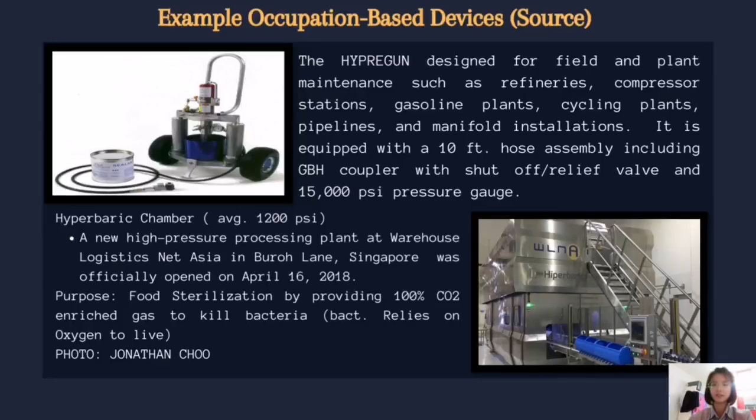Next is pressure danger to humans. First is respiratory disease, a type of disease that affects the lungs and other parts of the respiratory system. Respiratory disease may be caused by infection, by smoking tobacco, or by breathing in secondhand tobacco smoke, radon, asbestos, or other forms of air pollution.

Next is electrocution. Electrocution is death or severe injury caused by electric shock from electric current passing through the body. The word is derived from electro and execution, but it is also used for accidental death.

Third is burn. A burn is an injury to skin or other tissues caused by heat, cold, electricity, chemical friction, or ultraviolet radiation. Most burns are due to heat from hot liquid, solid, or fire. Burns occur mainly in the home or the workplace.

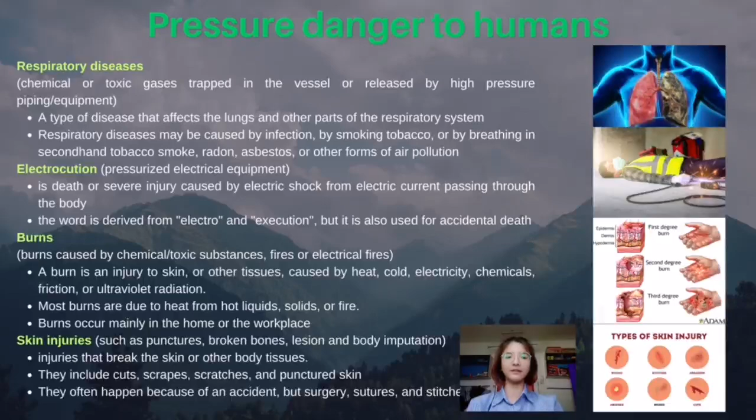Fourth is skin injuries, injuries that break the skin or other body tissues. They include cuts, scrapes, scratches, and punctured skin. They often happen because of an accident, but also surgery, sutures, and stitches.

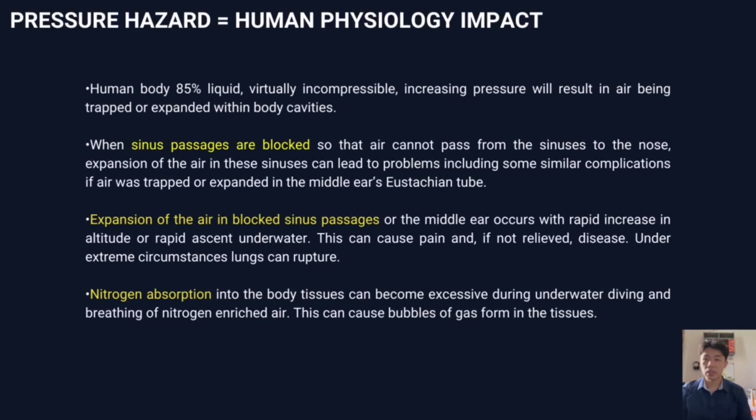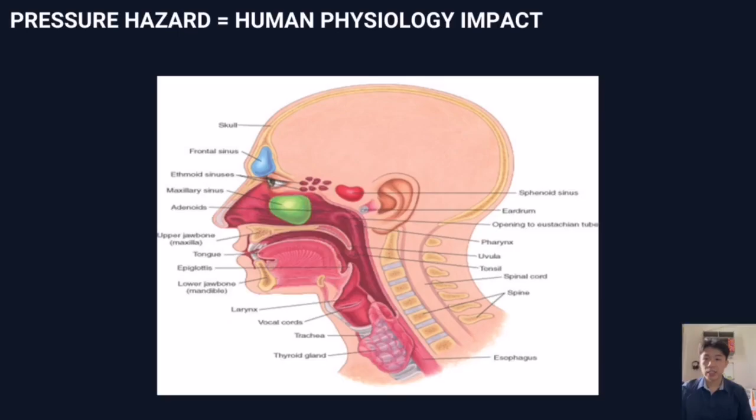A reduction in partial pressure can result in low oxygen, which can cause breathing problems like hypoxia, meaning too little oxygen, or breathing oxygen under pressure that is too high, called hyperoxia. It can cause nitrogen washout, oxygen toxicity, and oxidative stress.

Next is nitrogen narcosis, a problem resulting from a higher than normal level of nitrogen pressure. It can cause a reduction in cerebral and neural activities, leading to euphoria and loss of reality.

The symptoms of this illness are poor judgment, short-term memory loss, trouble concentrating, a sense of euphoria, disorientation, reduced nerve and muscle functions, and hyper-focusing on a specific area.

And for the third one, hallucination. Decompression sickness can result from the decompression that accompanies a rapid rise from sea level to at least 18,000 feet, or rapid ascent from around 132 feet to 66 feet underwater.

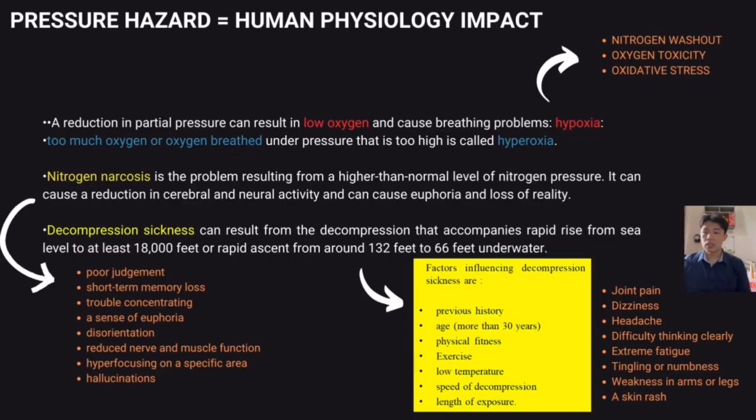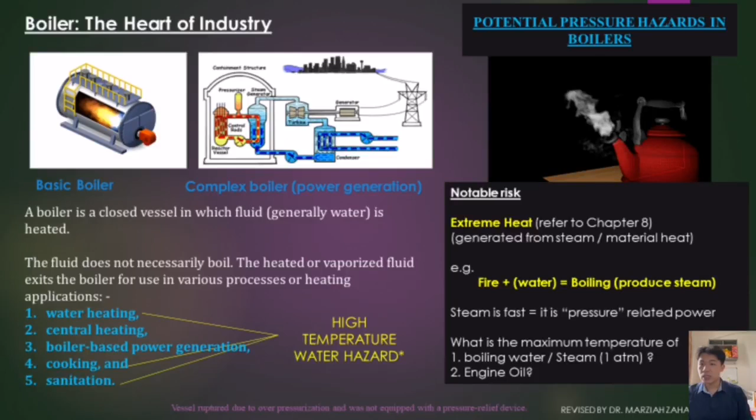Consequence is complete rupture or crack. First is blast effect due to sudden expansion of content of the vessel. Next is possible injury and damage. Third is suffocation or poisoning of employees depending on the contents of the vessel. Also explosion and fire, and chemical and thermal burns from contact with the content of the vessel.

The type of injury has four categories. First is serious burn, second is long-term scar, third is infection, and the last is death.

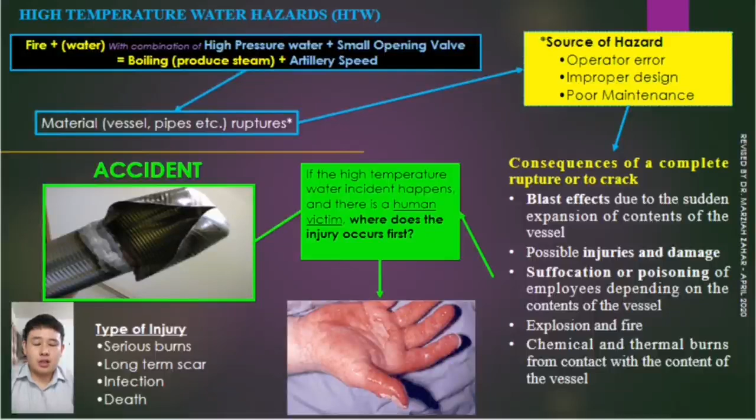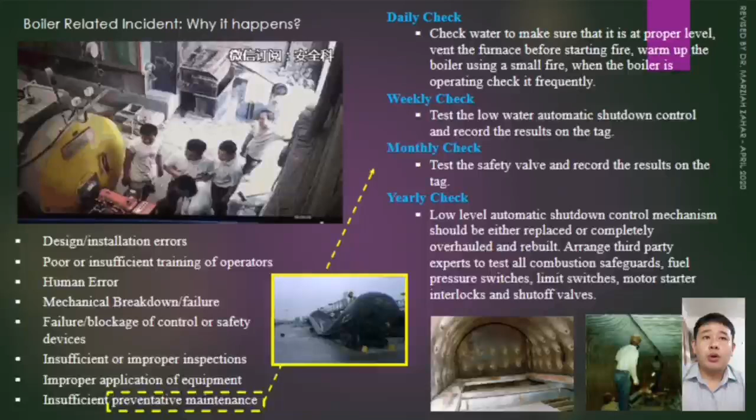Boiler related incidents - why do they happen? For the daily check: check water to make sure it is at the proper level, vent the furnace before starting fire, warm up the boiler using a small fire, and when the boiler is operating, check it frequently.

For the weekly check, test the low water automatic shutdown control and record the result on the tag. The monthly check is to test the safety valve and record the result on the tag. The yearly check: the low-level automatic shutdown control mechanism should be either replaced or completely overhauled and rebuilt. Arrange a third-party expert to test all combustion safeguards, fuel pressure switches, limit switches, motor starters, interlocks, and shut-off valves.

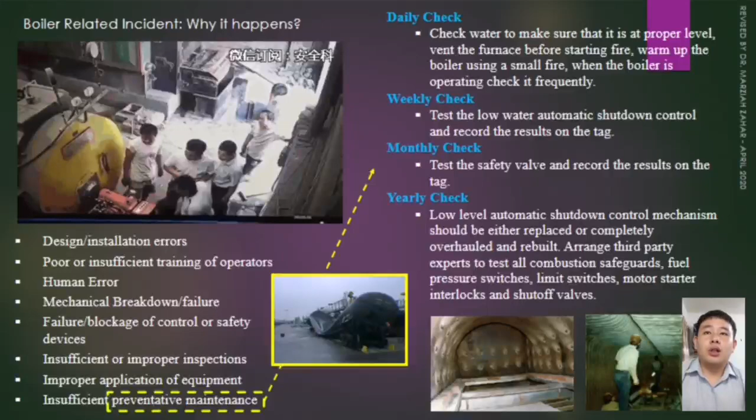Other reasons include design installation error, poor or insufficient training of operators, human error, mechanical breakdown or failure, blockage of control or safety devices, insufficient or improper inspection, improper application of equipment, and insufficient preventative maintenance. This is all the reasons for boiler related incidents.

For cracking hazard in pressure vessels, cracking mechanisms in which corrosion is implicated include stress corrosion cracking, corrosion fatigue, hydrogen-induced cracking, and liquid metal embrittlement. Water, steam, or liquid material plus hydrogen-based material plus oxygen, carbon dioxide, equals heat material or source. The source of hazard is leak, vibration, whiplash of broken high pressure pipe, and contraction and expansion.

For prevention: proper training, simple and operator-friendly design, periodic maintenance. There are some strategies to overcome this. First is vibration dampening, limiting the number of joints. Next is using pressure gauges, placing shields and barricades around the system, using remote control and monitoring, and the last is reducing human access.

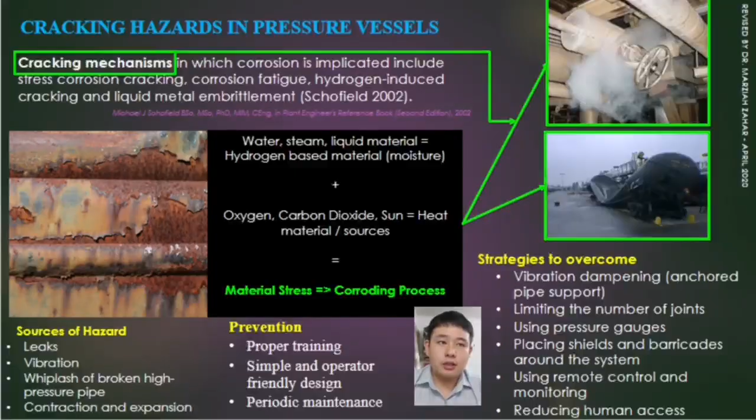So we continue with the part on maintenance: non-destructive testing of pressure vessels. Why does this happen? This is because, first, low cost - no unnecessary method - and it's concise to precise result, and does not compromise worker safety. There are two stages to know this.

This is how problems in pressure vessels happen. The first is first stage identification, which is leak indicator - we can hear the sound, signaling a leak, a whistling noise. The second is cloth streamer - the result is soap solution forming bubbles. This is added since the gas does not naturally have an odor. Then flags corrosion, the long-term effect of escaping gases like metal cracking, and leak detector, which means measuring pressure.

The second stage identification is for more confirmation, like the process. The first is visual examination for corrosion, and liquid penetration test, which is letting the liquid seep in, which can be enhanced using fluorescent chemicals. The third is radiography test, using X-ray - holes, voids or discontinuities produce a greater exposure with a dark area on the X-ray negative.

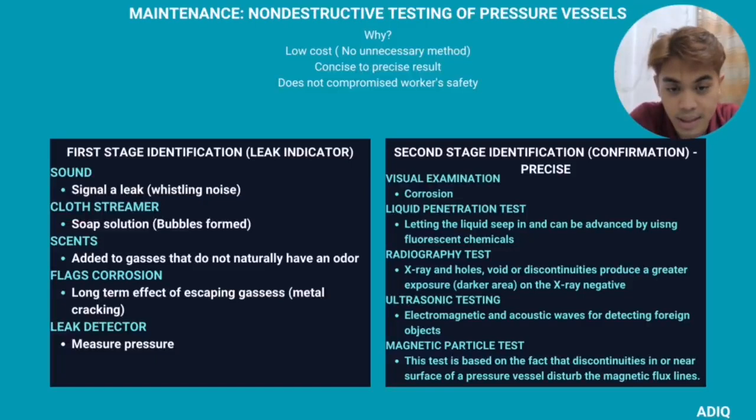Ultrasonic testing is the fourth stage - electromagnetic and acoustic waves for detecting foreign objects. The last one is magnetic particle test. This test is based on the fact that discontinuities in or near the surface of a pressure vessel disturb the magnetic flux lines.

So here's the part for maintenance non-destructive testing of pressure vessels. This is the picture with soap solution first, then the visual corrosion test, measure pressure, liquid penetration test, gamma X-ray test, ultrasonic, and the last one is magnetic particle test.